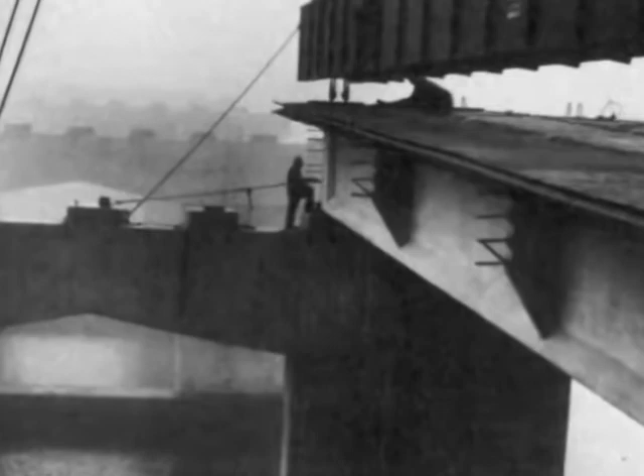Who would have dreamed that the introduction of a new application of concrete to American construction would become the foundation of 50 years of human daring, risk, and innovation? Who would have imagined that the 1950 construction of the Walnut Lane Memorial Bridge in Philadelphia would so dramatically change the thinking of American engineers and designers?

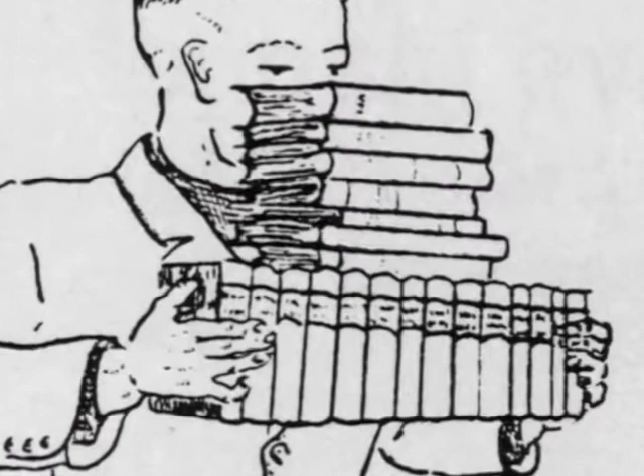No single event was more instrumental in launching the pre-stressed and precast concrete industry in North America. And no person was more significant in making the Walnut Lane Bridge into a reality than Professor Gustave Magnel of Belgium. A charismatic, dynamic engineering genius, Magnel developed the concepts for pre-stressed concrete while at the University of Ghent. He brought his ideas to America during a visit in 1946.

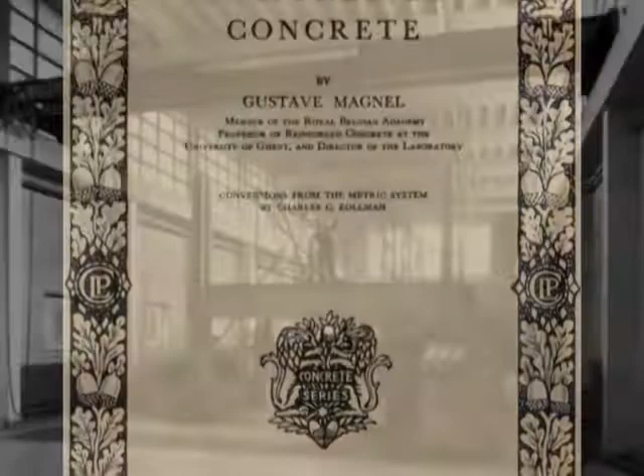Charles C. Zollman, a former student and a Pennsylvania consulting engineer, worked with Magnel, and together they outlined the benefits that pre-stressing would provide to concrete components. Their report led to the testing of full-size bridge beams developed by Magnel. Zollman then worked with Ted Goot of the Preload Corporation and officials in Philadelphia's Bureau of Engineering, Surveys, and Zoning to create a design that took full advantage of pre-stressed concrete's benefits.

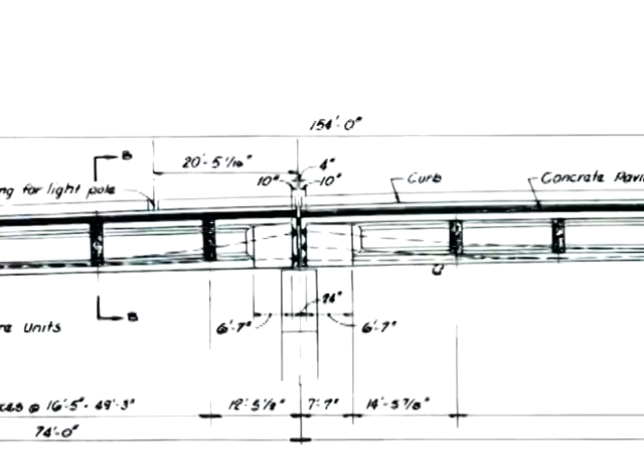Bids for the project were taken on January 19, 1949. The contract was awarded later that spring to the Henry W. Horst Company in the amount of $698,000. Interest in the project was extremely high. More than 300 engineers from 17 states and 5 countries watched a test of a girder like those used in the Walnut Lane Bridge's main span. The project proved to be an unqualified success.

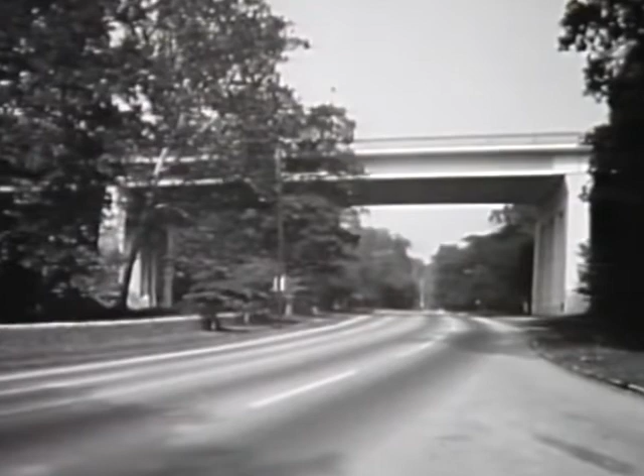The Walnut Lane Memorial Bridge met a variety of challenges and proved that pre-stressed concrete could provide benefits unmatched by any other material. It was the culmination of many innovations developing around this new technology during this period. For instance, as early as 1944, the first technical committee on pre-stressed concrete was organized by ACI and ASCE.

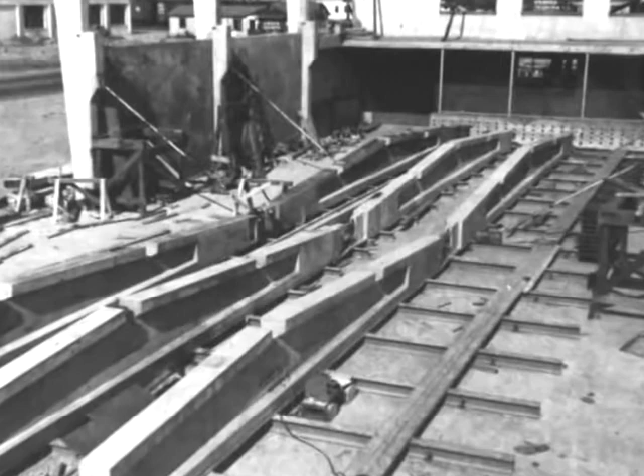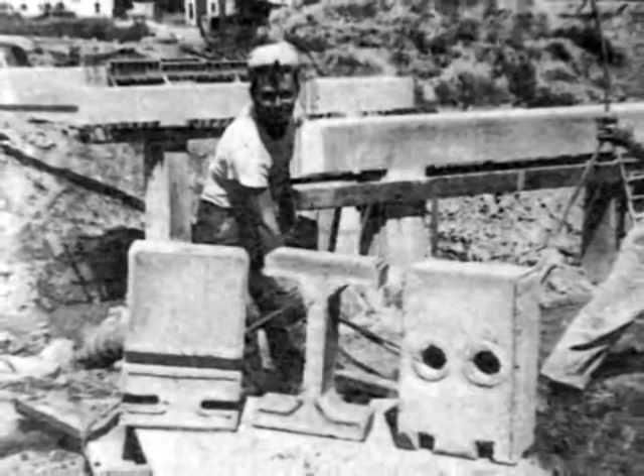Then, in 1948, the first stress-relieved wire was developed by John A. Roebling and Sons Company. And in 1949, Concrete Products of Pottstown, Pennsylvania, created the first pre-tensioning bed to make pre-tensioned bridge beams. Soon came such innovations as the Michigan block beam system, which required only 3 components to produce. The first pre-stressed girders designed for a building were produced in 1951 in Tulsa, Oklahoma, using button-headed linear pre-stressing. That same year, in Tacoma, Washington, Anderson Brothers built their pre-stressing plant.

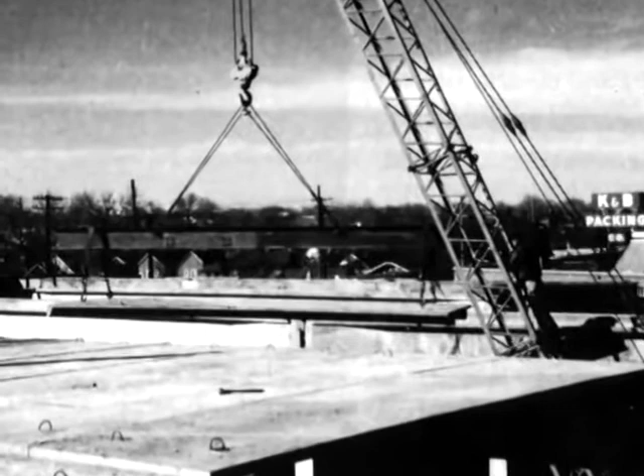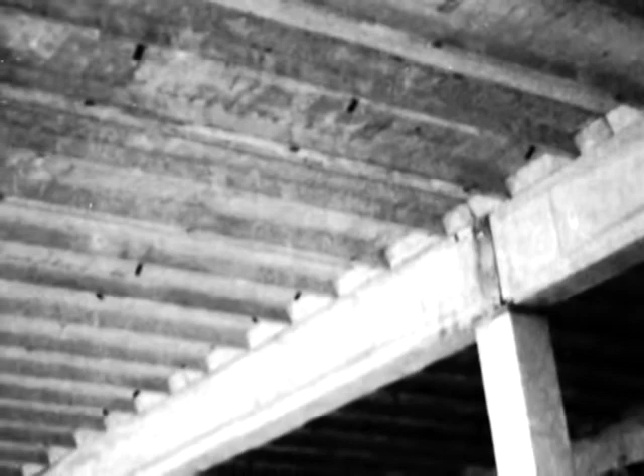In 1952, Prestressed Concrete of Colorado produced a double T design. Marketed as the Twin T, it was first used for a cold storage warehouse for Beatrice Foods. It allowed larger spans between beams and remains a key component design to this day. The Arroyo Seco pedestrian overpass in Los Angeles marked the first use of pre-stressed concrete in California. It used a post-tension stressing system developed by the Prestressed Concrete Corporation of Kansas City.

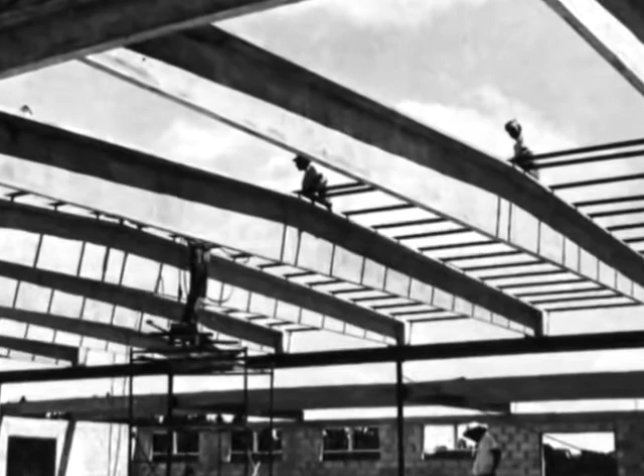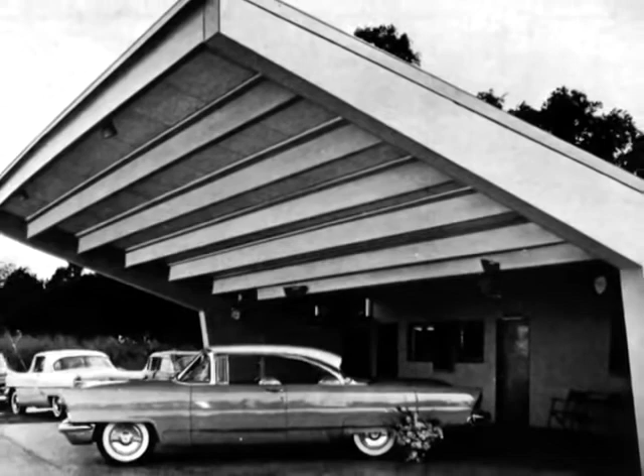In Florida, there were innovations such as 60-foot pre-tension warehouse beams, new pre-stressing facilities built by Florida Prestressed Concrete in 1953, and innovative ideas of all sizes and shapes. A variety of bridge designs were created in Florida, spearheaded by the Tampa Bay Crossing in 1951, which sustained the momentum of the Walnut Lane Bridge.

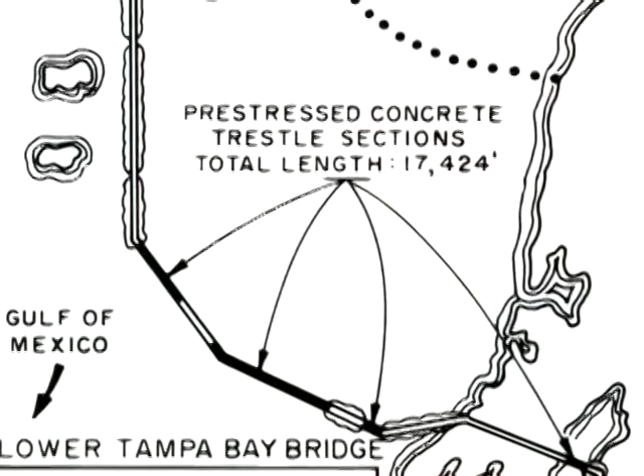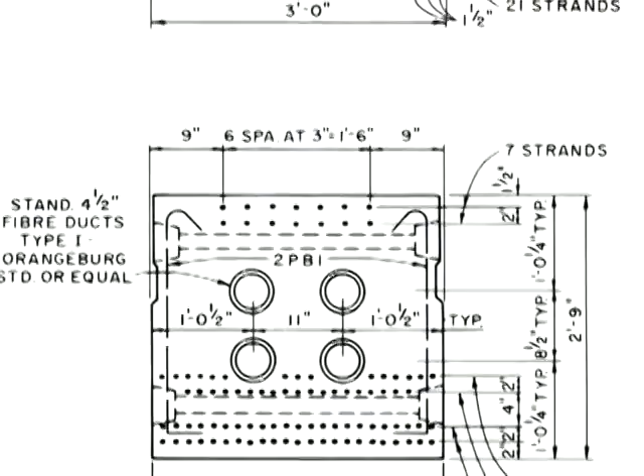During this time, box girders for short spans were designed that took advantage of sonovoids. Testing these box girders in the early 1950s led the Pennsylvania Department of Highways to approve the use of pre-stressed box girders for 6 expressway overpasses in downtown Philadelphia in 1955. The project marked the first ever large-scale application of box girders in the country.

Throughout the 1950s, pioneers in the pre-stressed concrete industry continued to expand the material's design capabilities. One was Harry Edwards, president and founder of Leap Associates, a consulting engineering firm in Lakeland, Florida. Founded in 1950, Leap has concentrated its services almost exclusively on the development and promotion of pre-tension concrete and the computerized analysis of pre-stressed concrete structures. Another early innovator was consulting engineer Ross H. Bryan of Nashville, Tennessee.

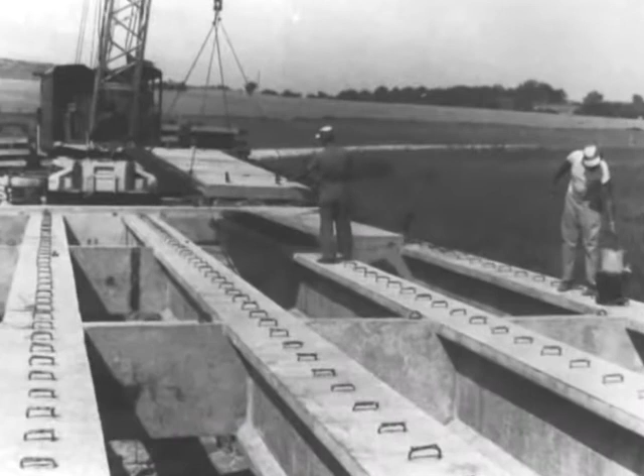Bryan designed the first linear pre-stressed structures in the U.S., as well as the first structures using deflected pre-tension strands. He also developed design procedures for establishing continuity in precast pre-tension concrete members by using mild reinforcing steel.

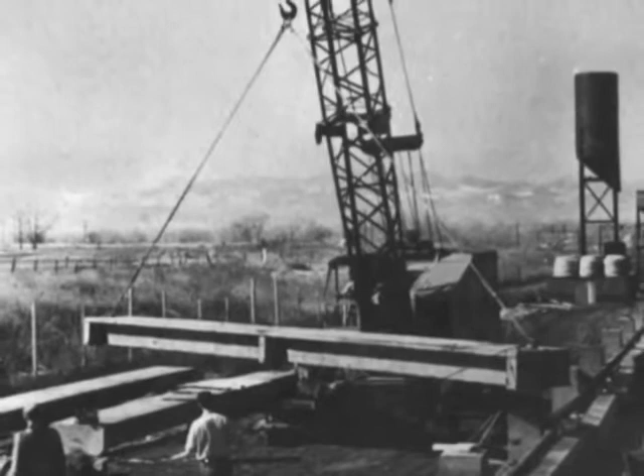Further west, George C. Hansen, a structural engineer with Phillips Carter Osborne in Denver, contributed design criteria for precast pre-stressed members, from fabrication to construction applications. He also developed load tables and brochures for pre-stressed members.

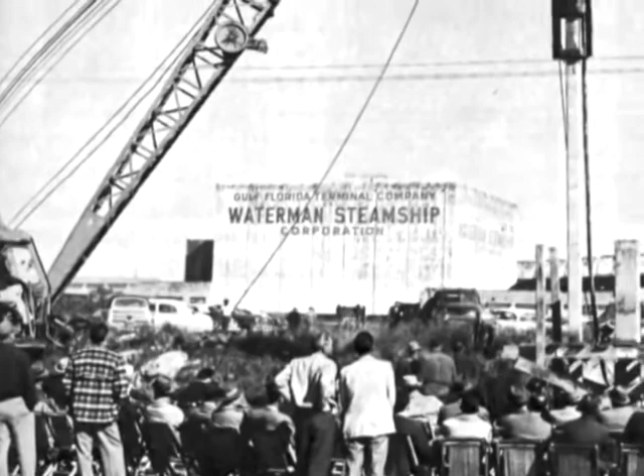Over the years, continued advances in pre-stressed concrete led to the need for a central organization to unify and advance the industry. An early informal association was created among the first pre-stressing companies. Ultimately, 6 Florida manufacturers joined to form the Prestressed Concrete Institute on June 18, 1954. Those 6 companies were Cone Brothers, R.H. Wright & Company, Durastress, West Coast Shell Corporation, Lakeland Engineering Associates, and Lakeland Concrete.

They created 6 classes of members: active for pre-stressed companies, associate for related businesses, professional for architects and engineers, junior for professionals in training, student for those in architectural and engineering colleges, and honorary as designated by the board.

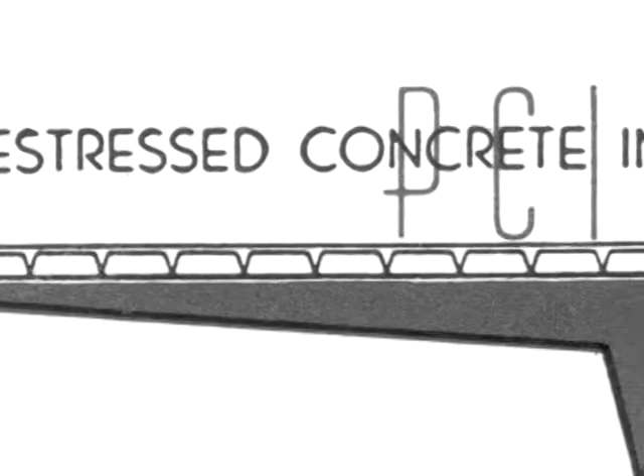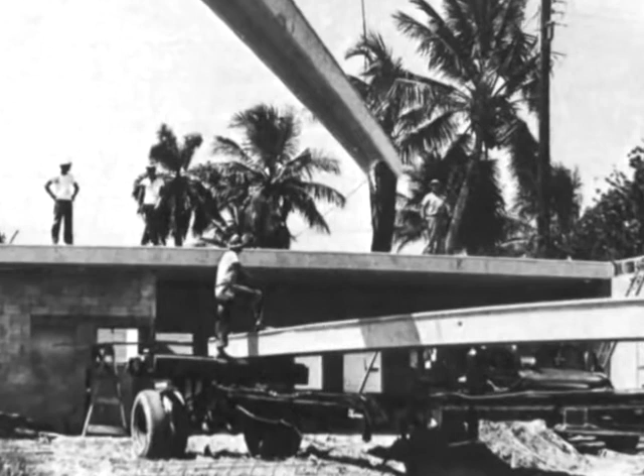Right from the start, PCI's founders recognized they weren't creating just another trade association. PCI would be an organization directed by the active participation of professional engineers. This unique combination of producers, suppliers, and professionals nurtured the growth and vitality of the pre-stressed concrete industry and led it to become what it is today.

Douglas P. Cone was elected PCI's first president. George Ford served as vice president, while Harry Edwards was named secretary-treasurer. These men, along with the organization's directors, established 4 objectives for PCI. 1. Develop standard specifications for pre-tension products for designers and engineers. 2. Conduct full-scale fire tests of roof and floor slab products. 3. Develop and promote the standardization of beam sections for bridges. And 4. Produce a technical journal and newsletter.

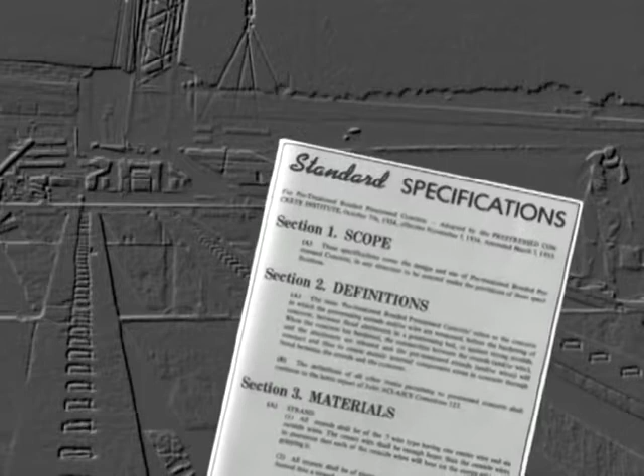These goals were quickly achieved. PCI released its first industry standard, Specifications for Pre-Tension Bonded Pre-Stressed Concrete Products, on November 7, 1954. As progress continued, the group held its first annual convention at the Lago Mar Hotel in Fort Lauderdale, Florida, on April 21st and 22nd, 1955. More than 300 engineers, designers, contractors, and producers attended.

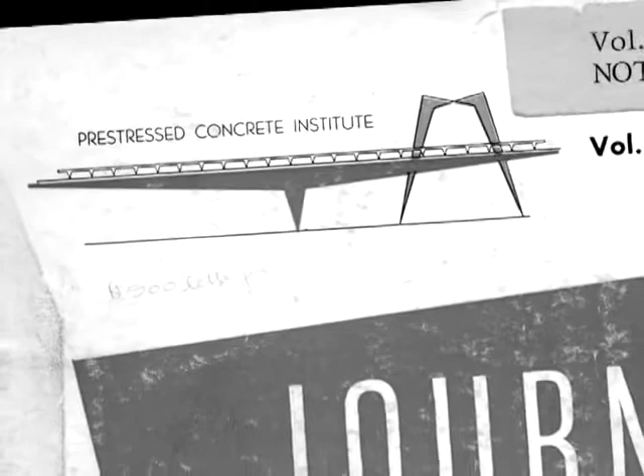In 1955, PCI Items debuted as a monthly periodical. It was followed in May 1956 by the quarterly PCI Journal. Now a bi-monthly, it remains one of the premier communication vehicles of the precast concrete industry.

On September 1, 1956, PCI created a permanent headquarters staff when Colonel Martin P. Korn, a former consulting engineer, was appointed PCI Executive Secretary. The organization opened its temporary headquarters in Boca Raton, Florida. 3 years later, the Florida Prestressed Concrete Association was formed to promote the material locally. PCI headquarters moved to Chicago in December 1959, where it remains today. But while the headquarters has remained in one place, the industry has moved ahead with breathtaking speed.

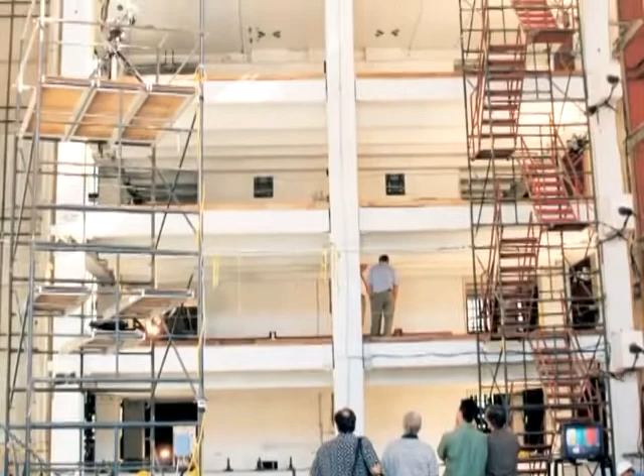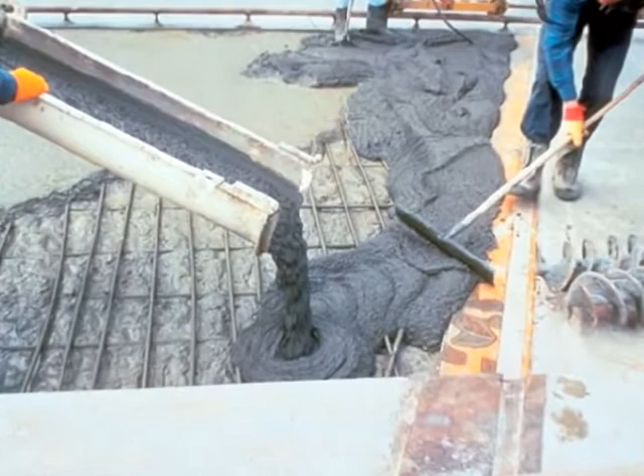Today, architects and engineers continue to advance the industry's capabilities, using new technologies and ideas to stretch design parameters. Recent advances include breakthroughs in seismic techniques that will expand the uses of precast concrete nationwide. Ultra-high performance concrete that will expand the durability of precast concrete to 30,000 psi and beyond. Self-consolidating concrete that will produce higher strength, faster production, and better aesthetics for all types of projects. And all precast bridges with beams, deck slabs, pier caps, and columns. These components can be used to replace bridges on rapid schedules.

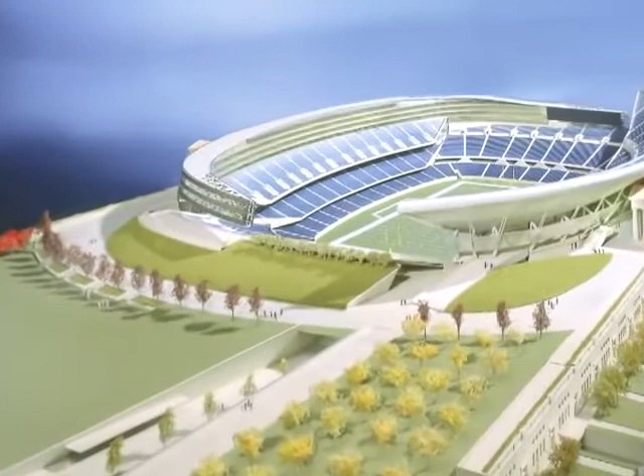Where will precast concrete take the construction industry in the next 50 years? The answer lies in the dreams of today's architects, engineers, producers, and suppliers as they continue to stretch the boundaries. Their work will be nurtured and strengthened by the encouragement, promotion, resources, and expertise of the Precast Prestressed Concrete Institute. After 50 years, the best is yet to come, and it begins today.